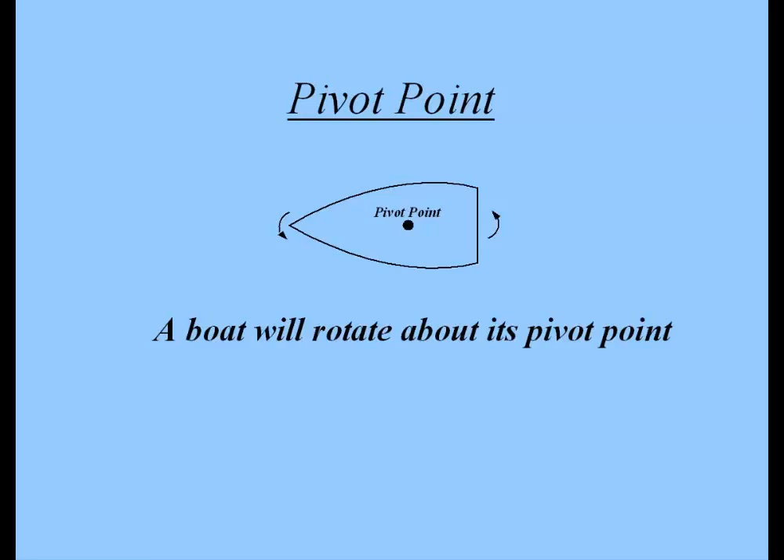So that's pivot point. The next item is the direction that the propeller turns. In the very beginning, I mentioned right-hand turning propellers. If you look at these two diagrams, you'll see in this first diagram, in ahead gear, a right-hand turning propeller. This is looking from the stern of the boat, and here's the keel, and here's the propeller. In ahead gear, the propeller is turning to the right, or clockwise. In reverse gear, it's turning to the left, and that's a right-hand turning propeller.

Now this has significance when we get to some other items and the techniques that we use.

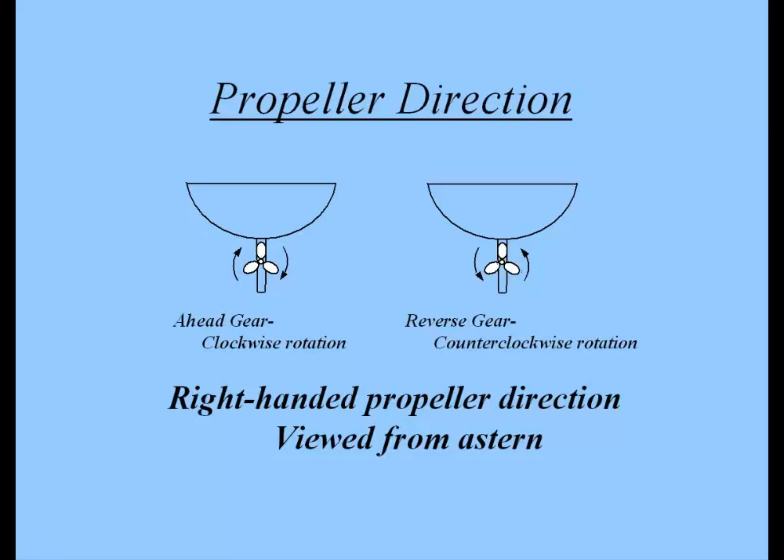But let's go on to the next concept, which is prop wash. Prop wash is like the air coming off of a fan. If you stand in front of a fan, it blows air in your face. That's akin to the prop wash. So the prop wash is the water flow coming off the propeller. In forward gear, the prop wash is flowing aft, and in reaction to that, the boat moves forward. In reverse gear, the prop wash is flowing forward, and the boat moves to the stern.

Now notice here in the forward gear, the prop wash flows over the rudder, and in reverse gear, the prop wash does not flow over the rudder. So that makes a difference in some of the controls that we use. Now this is the configuration that we have in most boats, and I'm not talking here with outboards or special marine drives, but I'm talking about a rather conventional arrangement with propeller and rudder, which is what you normally have on most boats.

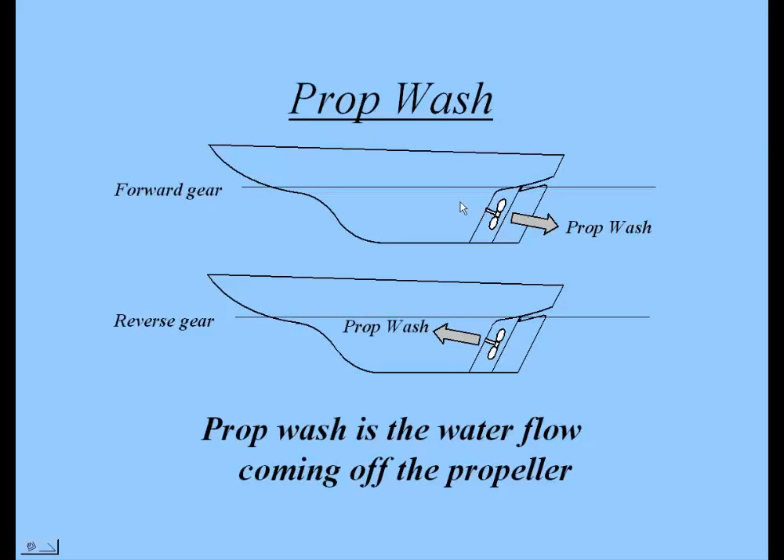The next concept is rudder control of the prop wash. Now you recall that the prop wash in forward gear is flowing aft, so that when we turn the rudder, if you look at the solid figure here, that's a boat facing in this direction, and the rudder is turned to the right, and the prop wash coming off the prop is deflected to the right. The result of that is that the stern of the boat will move to the left and rotate about its pivot point as a result of the reaction to this prop wash being deflected.

If we turn the rudder in the other direction, the prop wash will flow to the left and the stern of the boat will turn to the right. Okay, so that's how you control the prop wash in forward gear. In reverse gear, there is essentially no control of the prop wash.

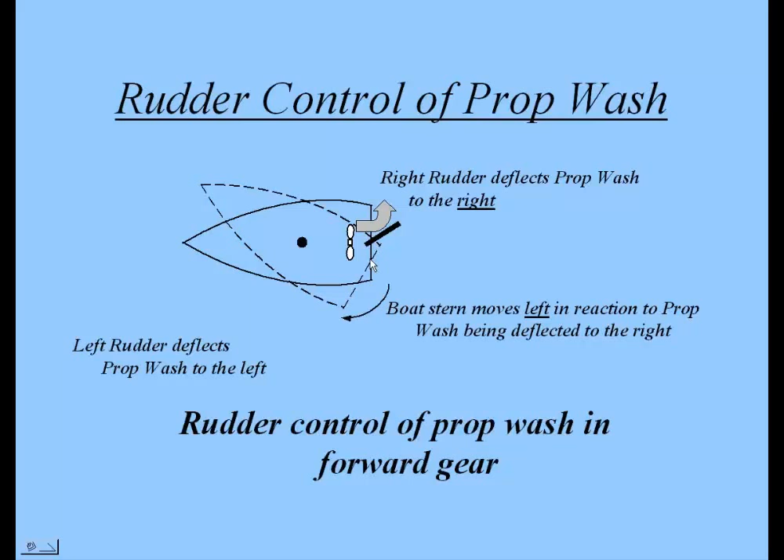So therefore they pull the stern of the boat to the left, or to port. The blade that's on the top is less efficient, and it does not have the effect of countering that pull to the left. So prop walk with a right-hand turning propeller, when it's in reverse, will pull the stern to the left. Prop walk is to the left is the thing to remember in reverse gear.

All right, the next item shown is turning arc. So this shows two diagrams of two different boats, and the one on the right has right rudder, and if you are going forward, the boat is going to follow an arc to the right. And if you go astern, the boat is still going to follow an arc to the right. So basically, the boat will follow an arc to the right, either in forward or reverse, when you have right rudder.

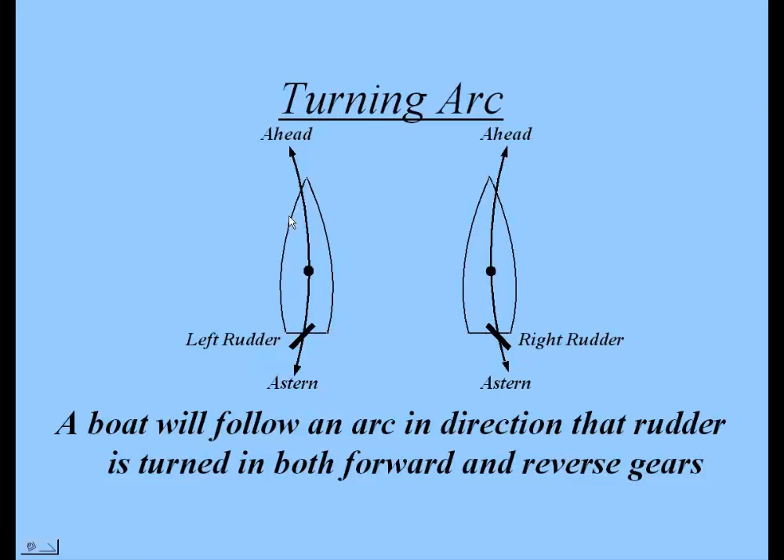In left rudder, a similar thing - it will follow an arc to the left. That's discounting any conditions of wind effect acting on the boat.

This shows a comparison between tiller versus wheel steering. In both cases, we're steering the rudder to the right, but in order to accomplish that with a steering wheel, we had to turn the wheel to the right to turn the rudder to the right. However, with a tiller, we push the tiller left to turn the rudder to the right. So if I say right rudder, with a tiller, you push the tiller to the left. But right rudder with a wheel, you turn the wheel to the right, just like you do in a car. You would be steering the boat in that manner.

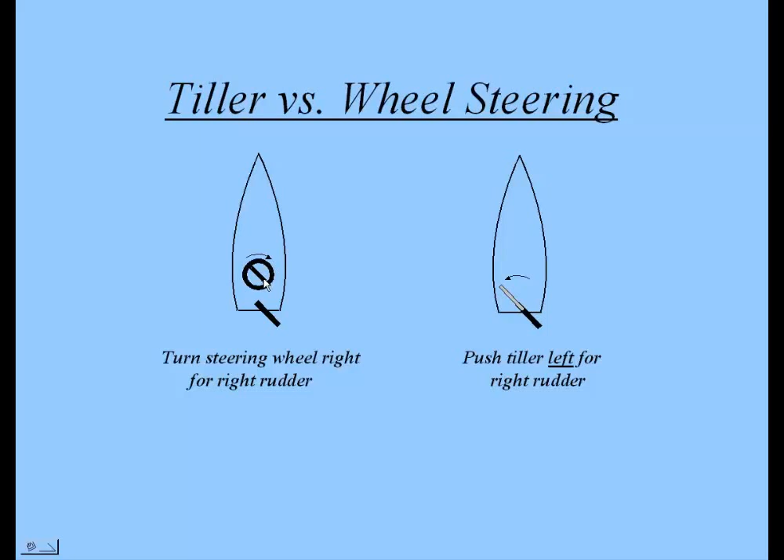Now this shows the effects of wind on a boat. A crosswind generally will blow most boats bow down with the wind. That's because the drag on the underbody of the boat is greater aft in the boat, and the drag on the rigging and the furled sails is greater forward in the boat. So the result of those two effects is to turn the bow downwind with a crosswind.

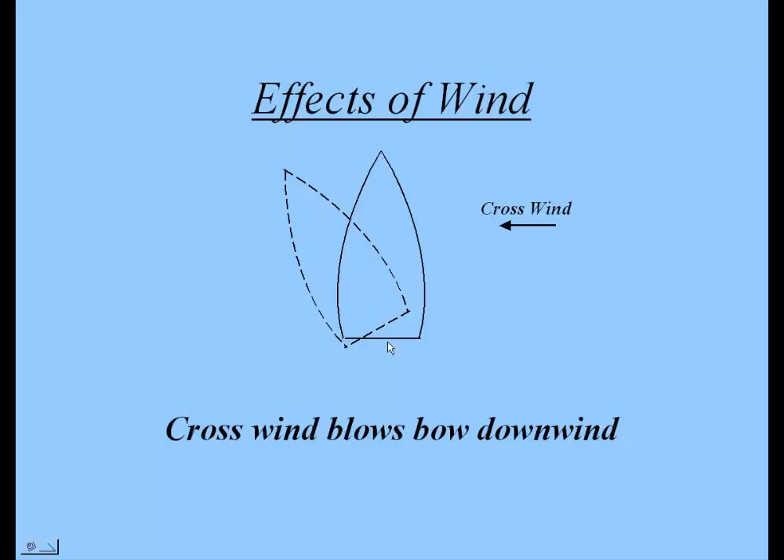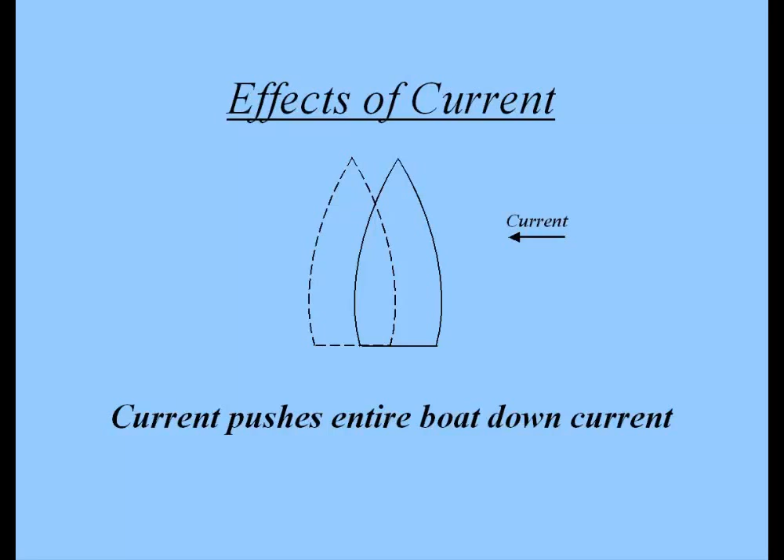The next shows the effects of current, and essentially that's going to move the entire boat. It's going to just transfer it down current.

The next item I want to mention is momentum, and that's related to the weight of the boat. The heavier the boat, the greater the momentum of the boat, and the momentum basically resists changes in speed. So a heavy boat will coast longer when it's moving, or it will take more power to speed it up. A lighter boat will do the opposite: it'll coast a shorter distance and it will take less power to speed it up.

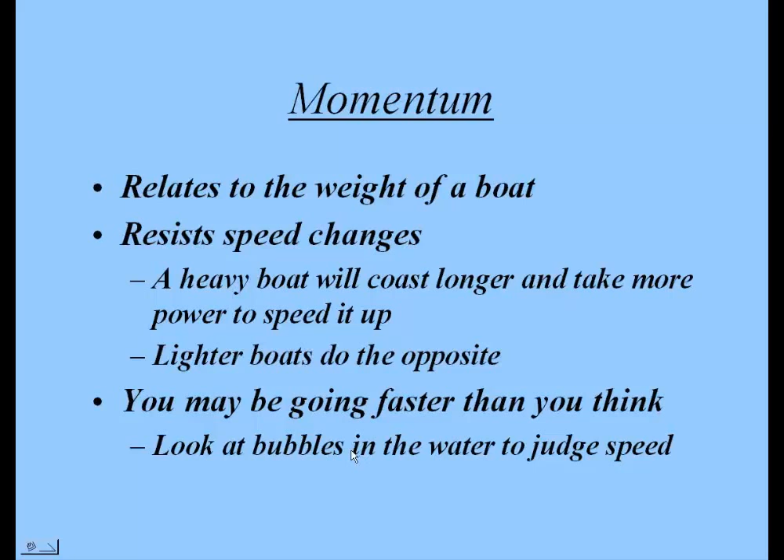You may be going faster than you think, and a lot of times in docking situations we say at certain points come to a complete stop. You look around you and think you're stopped, but if you look down at the bubbles in the water next to the boat, you'll see that the boat may still be moving along much more rapidly than you think it is. So check the bubbles in the water.

Throttle speeds, and these are somewhat arbitrary, but it's just to give you a concept of the kind of engine speeds we might be talking about. With a diesel engine in a boat, let's say a sailboat of about 30 feet in length, for slow speed you'll generally have the engine at about 800 RPM, at half speed ahead about 1500 RPM, and full throttle ahead about 3000 RPM. The reverse numbers are similar.

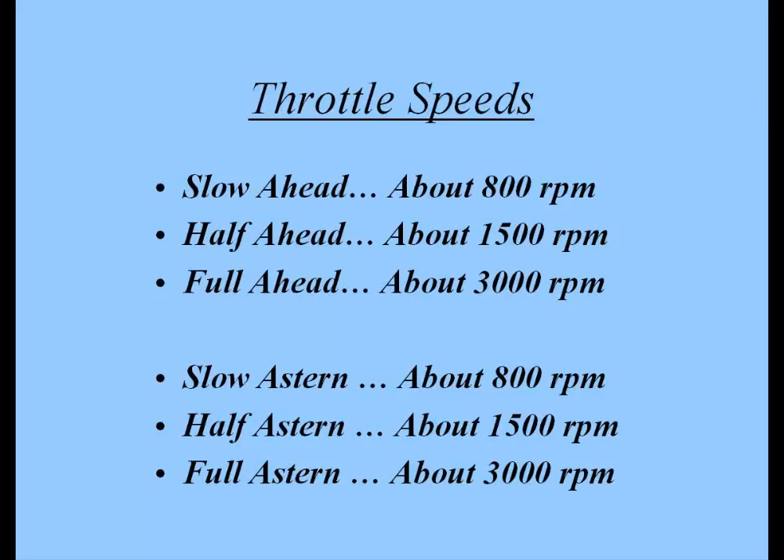Now, a term called throttle kicks. When we're doing our docking, there are certain times when we have to kick the engine, kick it hard or kick it not as hard. A kick ahead refers to full throttle ahead for about 3 seconds. A lot of times people are hesitant about going up to full throttle, but you have that momentum, that inertia of the boat, and you're trying to change its direction or boat speed, and there are certain times when you have to really pour the coals to it and kick it hard, kick it in the butt. So full ahead for 3 seconds is a kick ahead.

A short kick ahead would be half speed ahead for 1 second, just a short burst. The astern kicks are similar: kick astern and short kick astern. We use that terminology in our docking procedures, and when we're talking to each other during a docking maneuver: kick it ahead, or give it a short kick ahead. These are things to remember in that regard.

Now, rudder position. Again, this is somewhat arbitrary, and it's based on a wheel on the rudder, which from stop to stop is about 1.5 turns, which is the average for most boats, 1.5 to 2 turns. Right rudder, you turn the wheel a little bit to the right. Half right rudder, turn the wheel about a third turn to the right. And full right rudder, turn the wheel to the stop, about three-quarters of a turn. Left rudder would be similar. If you can't remember all these things I'm going through, they are covered in our docking manual.

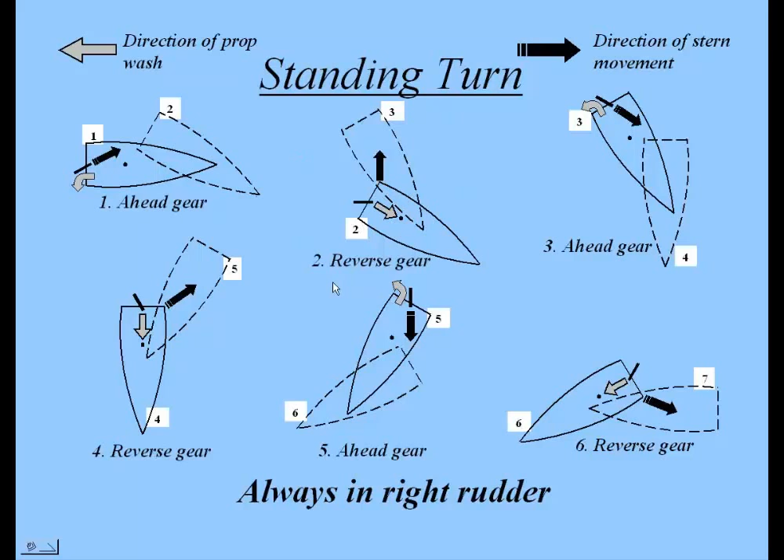So that's a standing turn, commonly used in docking procedures—either a full 360 turn, a quarter turn, or a half turn as shown here. You want to master the standing turn; it's a vital procedure for docking a boat.

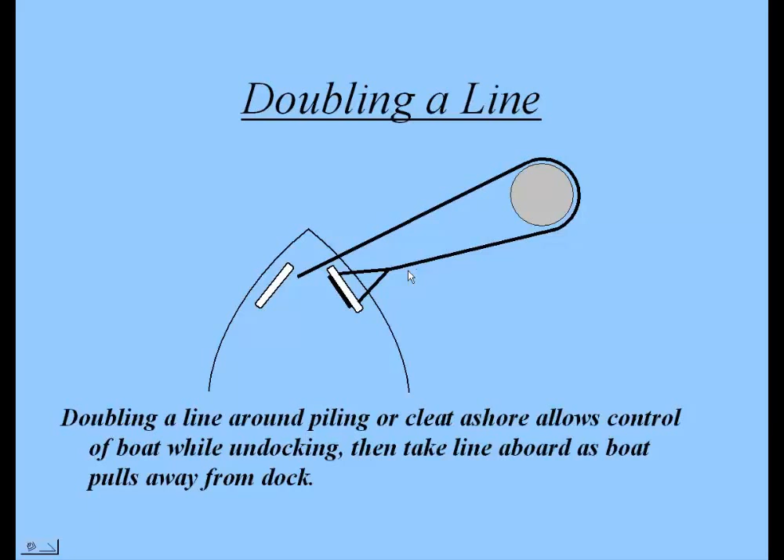The next item I want to show you is doubling a line. This is when you're getting away from a dock and want to bring your line with you, but maintain control on a dock cleat or piling. You'll double a line around that piling so that as you back out, you can take the line with you. We'll refer to this in some of our procedures in a few minutes.

I mentioned shifting gears—don't jam the gears through neutral. Coordinate the gear shift and the throttle, and speak the words to yourself: forward, neutral, reverse, to make sure you make a conscious stop in neutral.

Mooring lines, what we recommend is 3-strand nylon. I recommend against using braided nylon for mooring lines. They don't handle as well in your hand, and they also don't resist abrasion as well as 3-strand nylon.

We always use nylon for docking lines because nylon line stretches. Actually, it'll stretch about 40% of its length before it will break. So 3-strand nylon is the line to use.

Secondly, I recommend plain ends with a bowline knot as needed, and avoid the use of braided loops. The reason is, when you put your loop on a piling or a cleat, sometimes someone else comes along with another boat and puts their line over yours, and when you're trying to get out, it's locked in with a braided loop. It's easy to untie a bowline and just slip your line out.

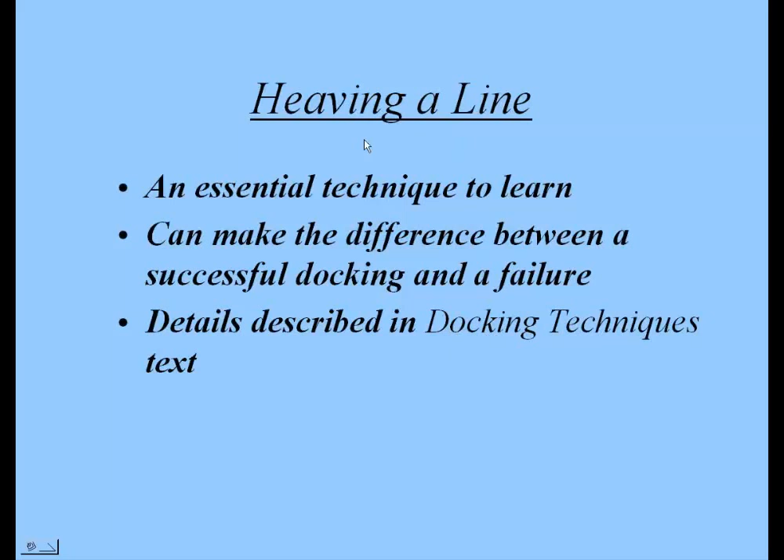Docking safety: I suggest you don't attempt to manhandle large boats over 28 feet, because this is where injuries can come in. By manhandling, I'm referring to pushing on a piling with your hands, putting your foot on the piling or on the dock—these are where injuries come from. We recommend that once boats get up over 28 feet, they're getting heavy enough that you can sustain injuries.

Now, alternatives for docking in strong wind: one is to use spring lines, which we'll go over. A second alternative is to use a more accessible dock than you were planning to use. Thirdly, you might temporarily anchor out and not dock until the strong winds pass. Also for docking safety, remember to always plan an escape route for all your dockings, and we'll talk about this as we go through some scenarios.

Crew assignments: ideally you want to have 2 deck crew. People have asked, what about single-handed? You'll use the same procedures single-handed, but you have to do all the jobs by one person. So you have to understand the procedures, the techniques, the forces that act on the boat, but one person may end up doing it, so you have to be more agile for that purpose.

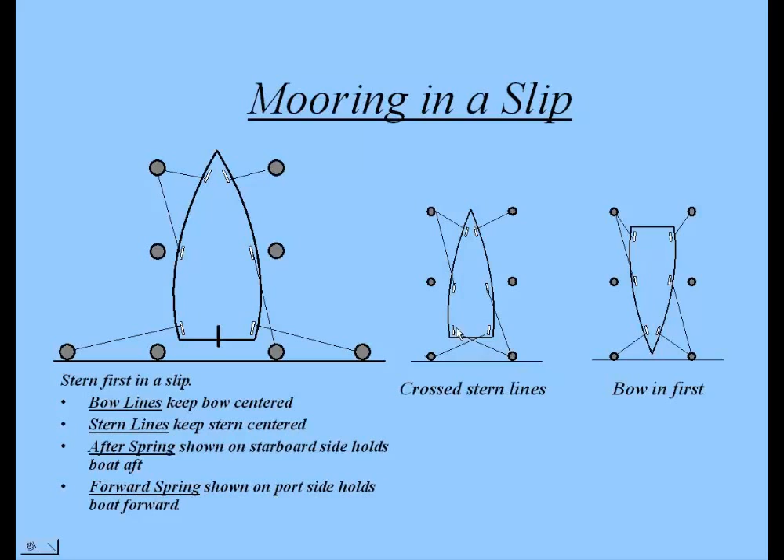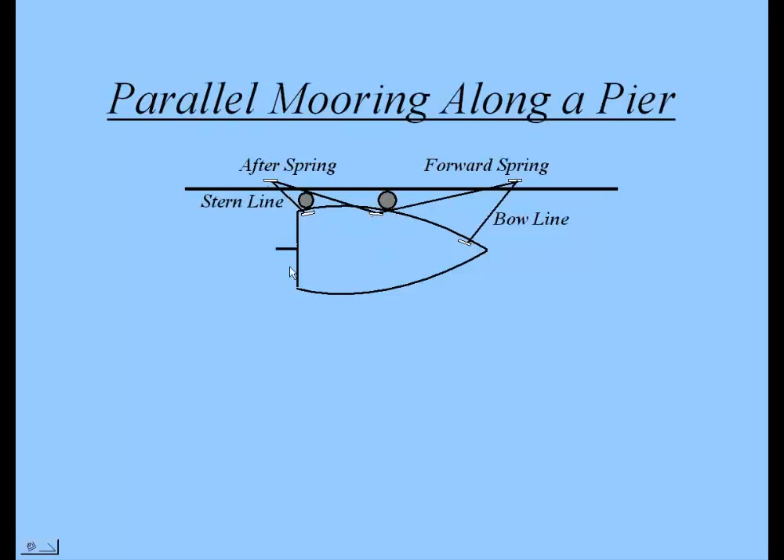If you have an arrangement where the wind is blowing strongly onto the dock, you may want to use an anchor, though you may not always have the room. This may be a fairway where it's not good to put an anchor out. But if you have the ability with a strong onshore wind, an anchor is one way to protect the boat and hold it off the dock. Your line arrangement is similar, but what you're doing with the anchor is basically taking the pressure off the boat riding up against the dock.

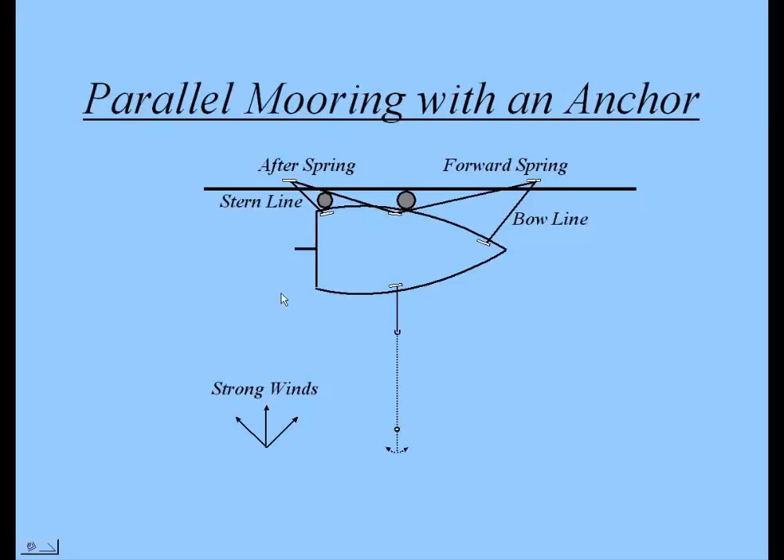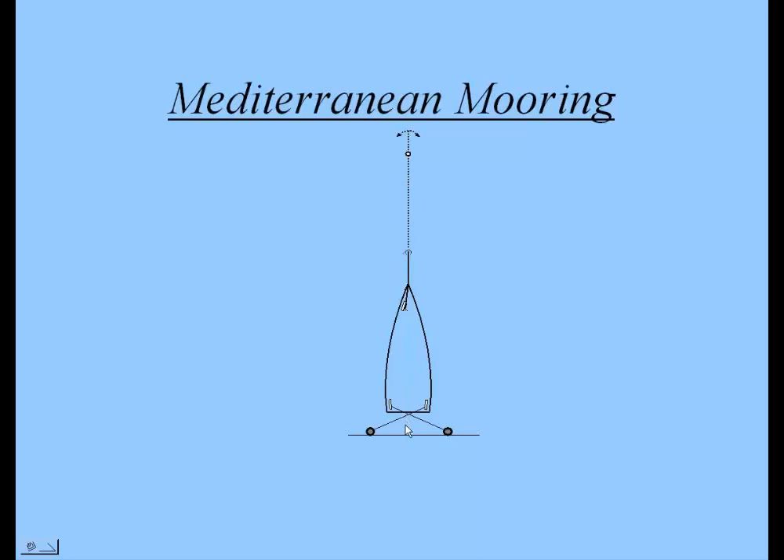A seaworthiness inspection of the boat means you generally check the entire boat, first for Coast Guard required safety equipment, including your PFDs, that is personal flotation devices, and flares, boat documentation, your man overboard equipment, engine and transmission oil levels, your steering gear, fuel and water tank levels, your through hull valves, bilges, bilge water, electrical panel and equipment, your instruments, your nav lights, your sails, your mast, your boom, standing and running rigging, ground tackle, dock lines, fenders, and the list goes on and on. You want to know that your boat is ready to go to sea.

You also want to check on your weather forecast, both over the VHF, maybe before you got down to the dock you checked on the internet. When you get to your boat, check the VHF and the NOAA channels, and if available on your boat, your Navtex receiver, which has weather forecasts on it. I highly recommend Navtex on boats even sailing coastal waters.

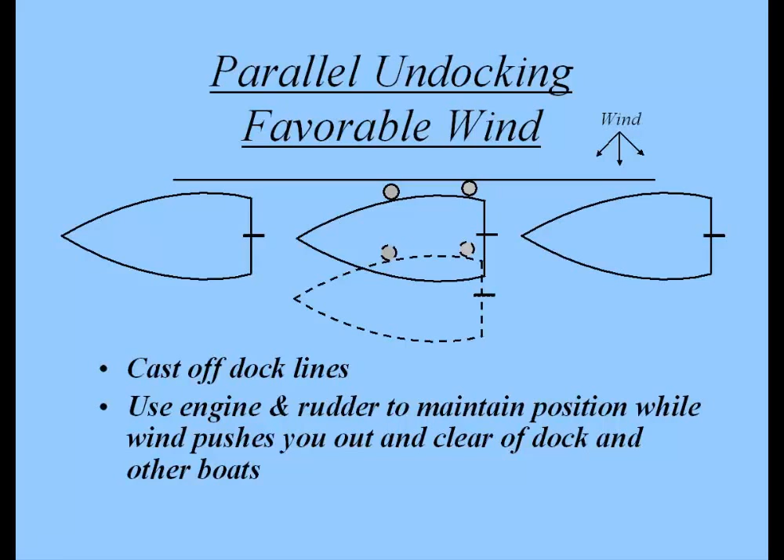Here's the simplest procedure for getting underway from a parallel docking arrangement where you have favorable winds. Here's the dock, and here you are in the center boat, with boats fore and aft of you. To get off this dock, you basically disconnect your mooring lines and let the wind blow you out. You have the engine running, of course, before you started this, and use short kicks of the engine forward or reverse to maintain position and orientation, that is the heading of the boat. Short kicks with the rudder forward or aft to maintain position while you're being blown out, and then you can get away from the dock when you clear those other boats.

That's the simplest departure. You have another situation where you have wind blowing onto the dock, and here you're being pinned against the dock with the wind. You have fore and aft boats obstructing your departure, and there are two procedures for doing this. One is the stern out procedure, and as I say, you have opposing wind.

You have a fender on the bow as well as back here, but the one on the bow is vitally important for this procedure. You have an after spring line from a bow cleat to back here on the dock, and what you will do is have right rudder and power forward slow ahead, in order to turn the stern of the boat out.

Now the spring line is going to hold the boat from moving forward, but the prop wash on the rudder is going to push the stern out. You want to have a deckhand forward with preferably a non-collapsing pole that you can use to push off the bow from the dock.

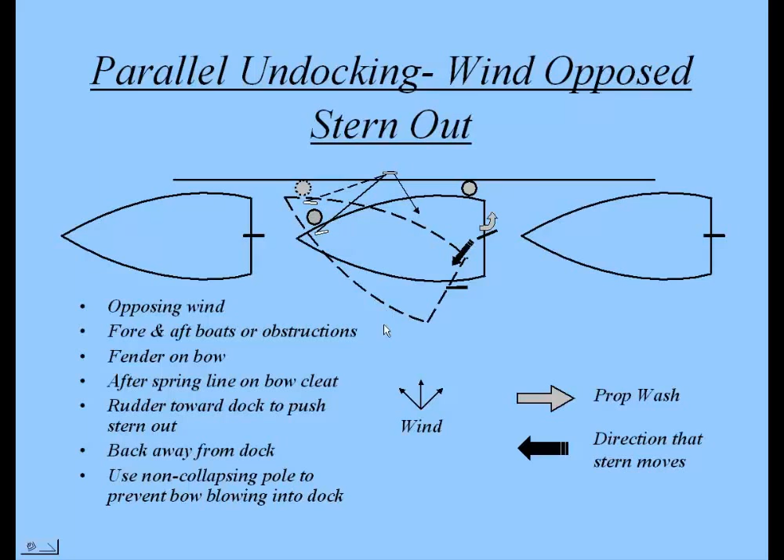So basically this is swinging the stern out and then backing out this way. Now with the wind blowing in this way, once you clear the bow from the dock, you also have to worry about this boat here. So you have to be prepared to clear this boat as well, and use your pole for that. So that's the stern out procedure.

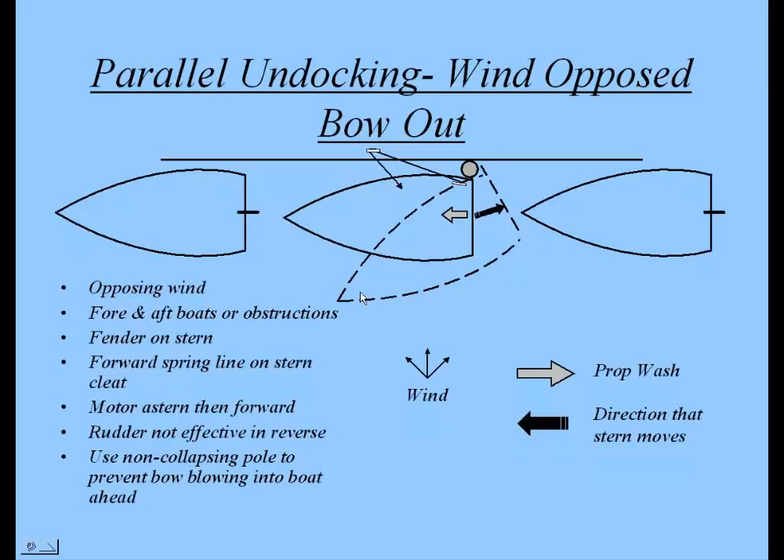The next procedure is bow out, and this is simply the opposite. Here you run your spring line from a stern cleat to a dock cleat, and you go in reverse gear. There's a fender on your stern, and the boat turns bow out, and you can then motor out. Between the two, I personally prefer the stern out procedure, and you might practice both in order to get proficient with both and find out what you like best.

So those are two methods for parallel undocking with opposed wind. Now the next procedure I'd like to show is heading bow out of a slip, and you have to consider the wind in these cases. In this arrangement, you are coming out of a slip, here are other slips across your fairway, and you have wind blowing down the fairway, and your desired route is going out this way towards the wind.

So when you do this, the wind is going to want to prevent the bow from turning at slow speeds, and you have to make provisions for that. If you have a strong enough wind, you may be blown into this dock across the way. So the use of spring lines in this case would help with this.

Now this spring line is run so that the line goes from your midship cleat around the piling and back around to you're holding it on deck. Two things about routing this spring line. One is, notice the direction that it's wrapped. It's wrapped so that when the boat comes out, the spring line will not be crossed. It'll straighten out into two parallel lines.

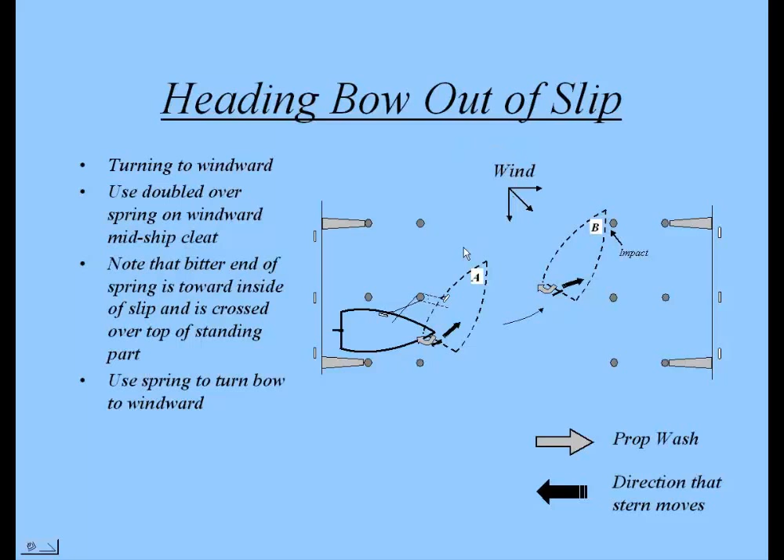So that's heading bow out of a slip with wind opposed to the direction you're going to be turning. Now here's backing out of a slip, bow to wind.

With this arrangement, here's a slip, here's a dock, here's a finger pier, and here's your midship piling. What I would be doing here is using wind opposed, with the fairway exit to the right. So I want to come and turn my boat, stern to the left, so that I can turn to the right and go down the fairway. But I have opposing wind to that, trying to prevent me from making that turn out of the slip and going down the fairway.

With this arrangement, I would use two spring lines. One is from a bow cleat coming back to this piling, and as before, it goes over the standing part, and the bitter end is held by a deck crew. The one from midship on port is similar, going around the piling and back over the standing part, so that I've got control of the boat in two directions. This is assuming I don't have a dock hand on the dock.

If I have a dock hand, I can have that dock hand handle the bow line and control the bow towards the wind as I back down. But if I don't have a dock hand, I can use the spring line, and as the boat gets to about this position, I can release that spring as shown here and gather it in. This spring line is now controlling the turn of the boat, assisting the turn into the wind, so it'll help me pull the stern around as I pull back with my engine in reverse.

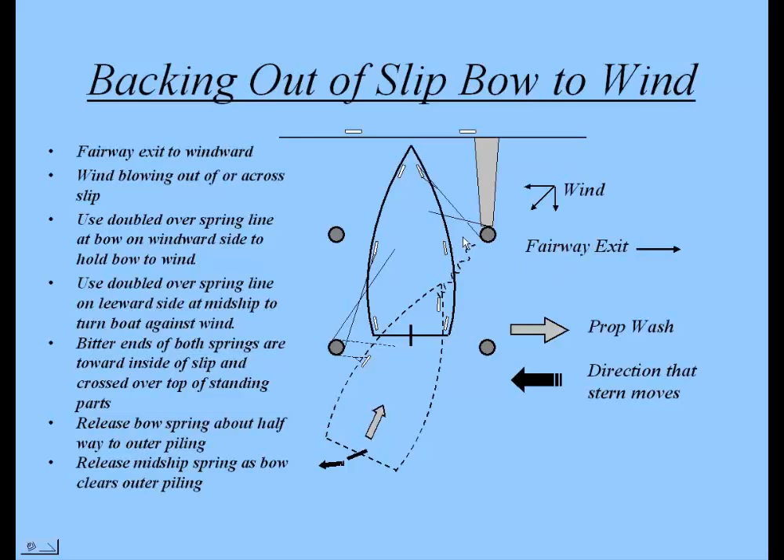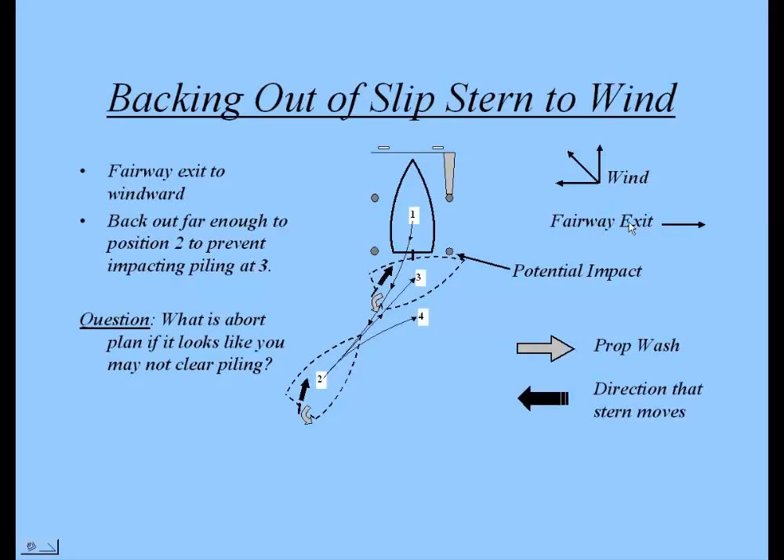The next docking arrangement that I'd like to show is coming into a dock now, and this is parallel docking along a pier.

Some of your pre-docking preparations: first, evaluate conditions that exist. If you have the ability to inspect this strange dock beforehand, and if you can do it from shore before you get on your boat, that's a good thing to do, to become familiar with what's in that slip. If you can't do that, you're going to have to call the marina ahead of time for the dock conditions, the wind angle, and the current that may exist in the vicinity of the dock you're going to get into.

You can also do a flyby in your boat—that is, before you actually go into that slip, run by it, be ready to do a standing turn to get out of that fairway, and while doing the flyby, inspect the pilings for nails and obstructions. These are ways to evaluate conditions before actually committing to docking in that particular slip. A slip that has pilings with nails in it, I wouldn't go into, because the nails can do significant damage to your boat.

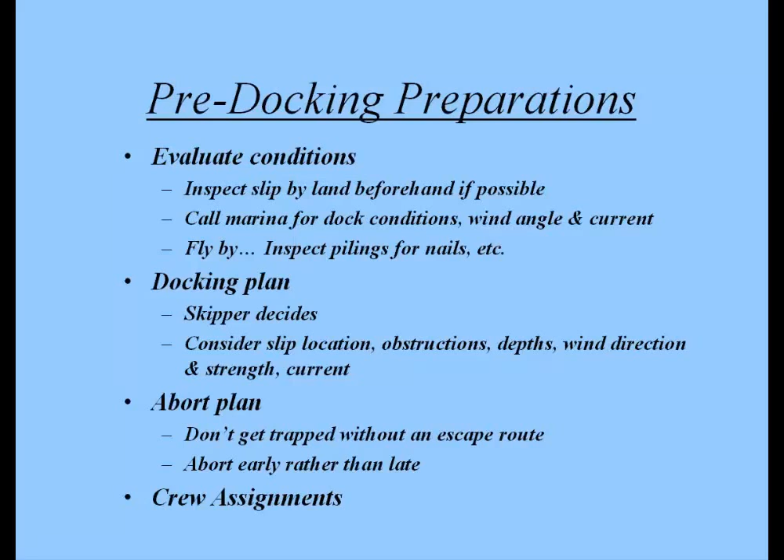Have your docking plan prepared ahead of time, because if you're coming into the slip and suddenly there's a problem—which isn't unusual—be ready to abort. The point of aborting the docking is: abort early. If you find you've misjudged your position or the wind and you're in the wrong position for getting properly into the slip, abort early, go around, and come back again to finish your docking.

So let's look at some parallel docking arrangements. First, wind blowing onto the dock: you stop parallel to the dock a few feet away, hold position with rudder and short kicks fore and aft, and allow the wind to push you toward the dock. With wind blowing off the dock, you use forward spring lines for a hemmed-in dock, and after spring lines for an open dock—I'll show you diagrams of both.

In general, all else being equal, I prefer a port side approach if possible, meaning the slip is to the port side of my boat, because this allows for a better abort route and more maneuvering room. But let me show you these other scenarios.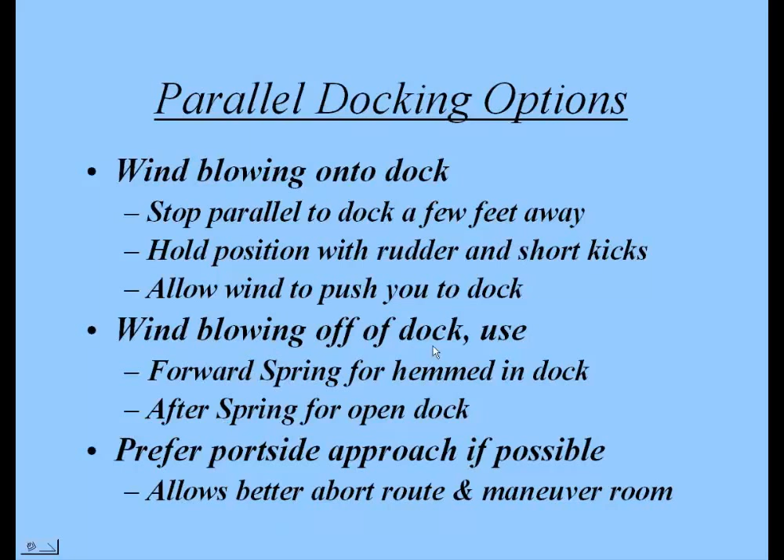Wind blowing off the dock is the hardest one. Forward spring for a hemmed-in dock, after spring for an open dock. Here's a hemmed-in dock, and I want to come into this dock. There are obstructions here and here. I want to get into this alcove on this slip, and to do this I'm going to rig lines in advance, before position 1, where the wind is blowing off the dock.

I want to rig two spring lines, or a midship spring and a bow line. The midship spring has a bowline loop tied in the end, long enough to reach the bow of the boat from the midship. The bow line has a bowline loop tied and is cleated to the bow cleat with about 6 feet of length on it.

The size of these loops depends on whether we have cleats or pilings on the dock. Obviously a piling takes a larger loop, and you want a loop that's plenty big enough for that piling. If I have a 12-inch piling, I'll generally have about a 2-foot loop in that line, big enough to easily get it on and off the piling. So I'll have these lines prepared.

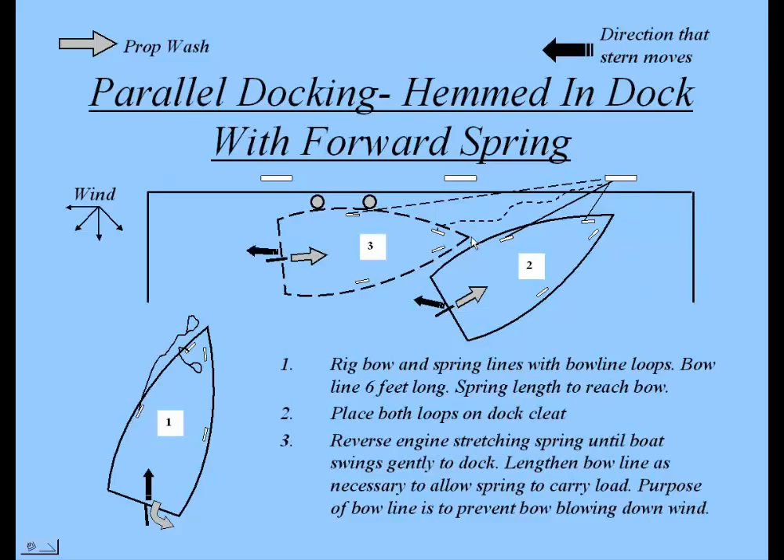So I use the rudder to control the direction of the boat parallel to the dock, but allow the spring to pull it over. Then once you're in, you rig your other dock lines. So those are a couple of parallel docking arrangements: one for a hemmed-in dock using a forward spring line and a bow line, and one for an open dock where I can come in parallel to it.

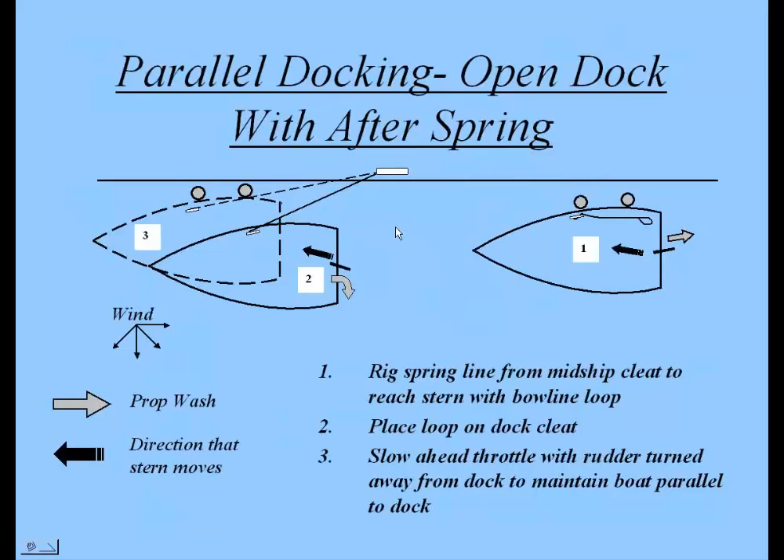You have a forward deck hand to call out your bow distances, because the helmsman cannot necessarily judge that from the helm. You're going to make a wide turn to the windward side of the slip to compensate for the bow blowing downwind. I'll show you a diagram of this.

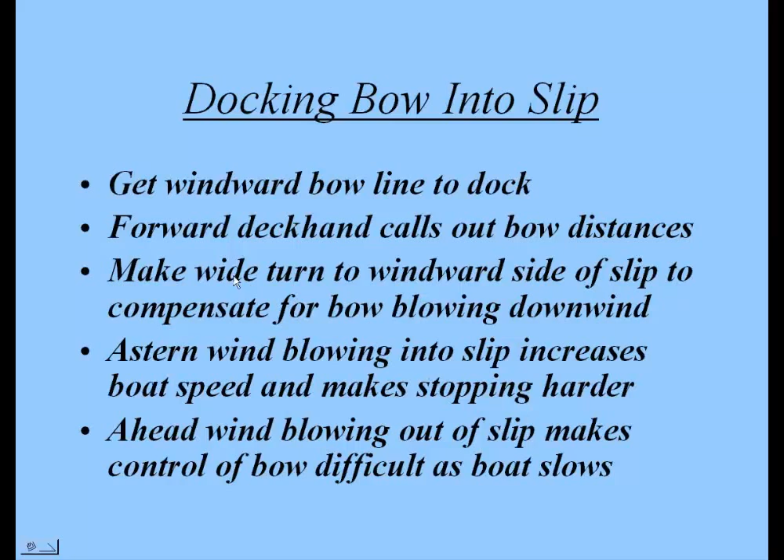And an astern wind is difficult because it speeds the boat up and has you going faster than you think you are. And a crosswind you have to compensate for in this manner.

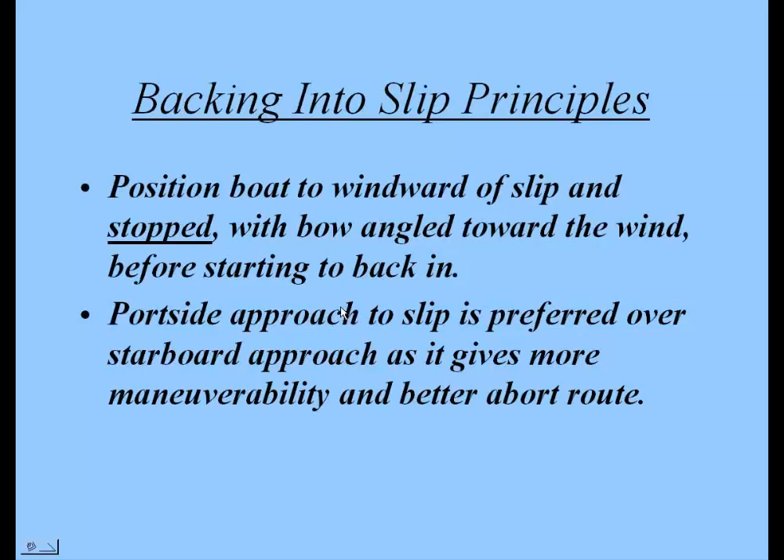Port side approach to slip is preferred over starboard side approach as it gives more maneuverability and a better abort route. I think you'll see this as we look at these scenarios. So let's look at the first scenario of backing into a slip, port side approach.

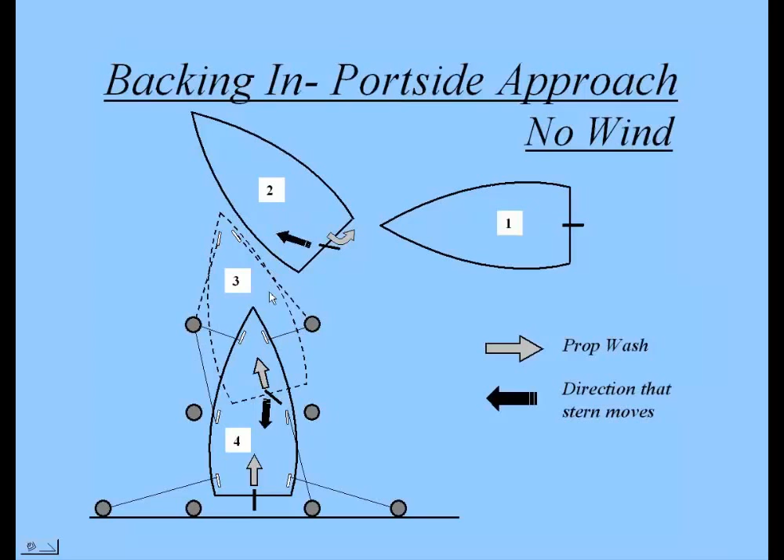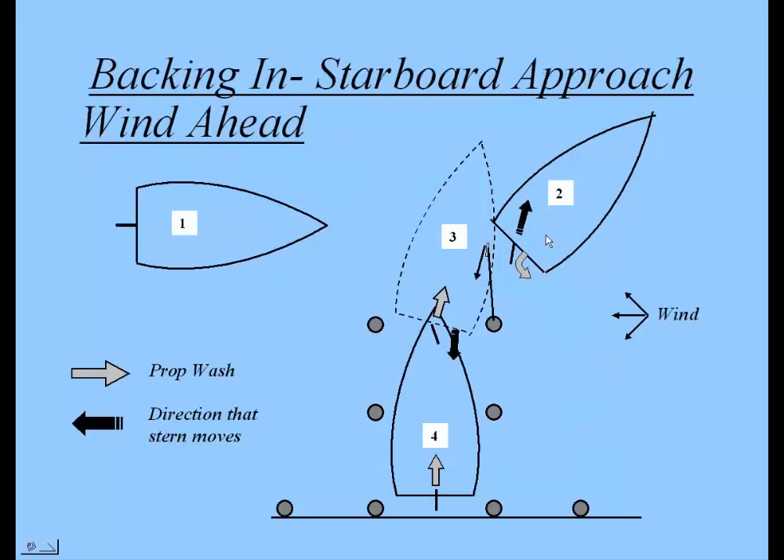And in this case, starboard approach, similar to port side approach, except for the effects of prop walk, wind from ahead. My next one is starboard approach, wind from astern. This is the hardest of all, doing a 3/4 turn or more to start my backing in.

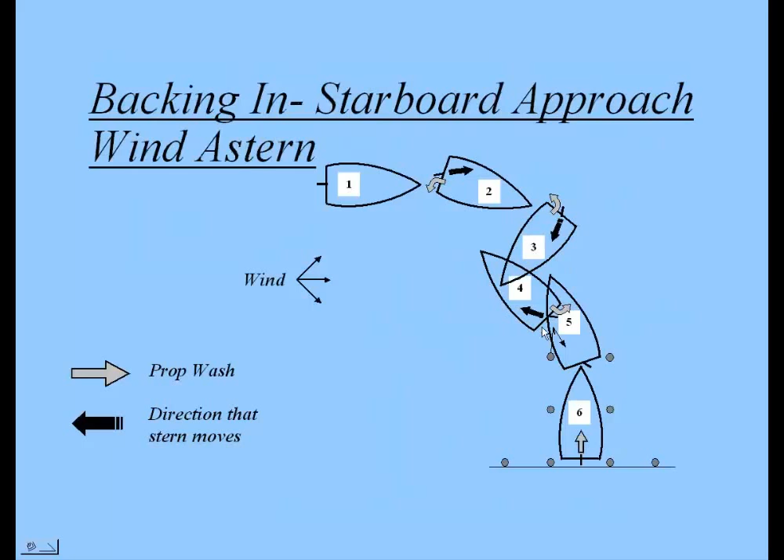Now, if you have really strong winds, let me mention these other wind conditions for backing in. If the wind is blowing into the slip, this is the most challenging wind condition that you can have, because as I'm backing in, I have the wind blowing into the slip. It's on my bow.

And oscillations in the wind keep you guessing. In other words, I'm backing in, and for one moment the wind is on my starboard bow. The next moment it shifts to my port bow, and it has differing effects on the bow of the boat as I back into the slip. Wind blowing out of the slip while backing in is the easiest wind direction, because it weathercocks the boat to line up with the slip center line.

Now, in strong winds, we'll use what I call a waterman spring line, and that is this. First off, it requires that you have a clean piling with no nails in it. It also requires that there's not another boat in the adjacent slip with their bow or stern sticking out to obstruct you, so you need the room to do this. But this is what the watermen on Chesapeake Bay commonly use to bring their fishing boats in single-handed to a dock.

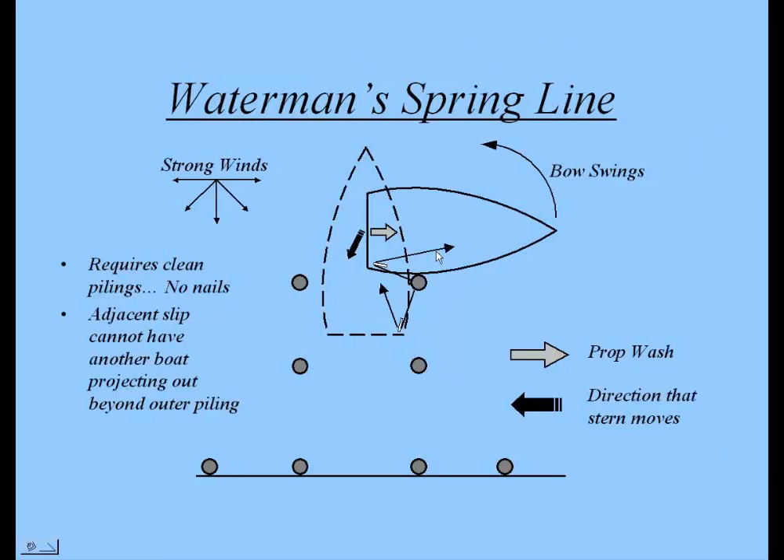So those are methods of getting a big boat into a little slip.

Now let's summarize all that we've gone through. First off, you have to understand the forces that act on a boat during the docking procedure. Understand the effects that wind has, that current has, prop walk, prop wash, rudder action right or left, and so forth. Learn how you can control these forces, and don't look at the wind necessarily as an enemy. The wind can actually be a benefit while you're docking if you know what it's doing and how to deal with it.

You want to remain alert for the effects of wind and current. When you're backing in, pay attention to the bow of the boat — what is the bow doing at the present time? Use slow speeds during docking, look at the bubbles in the water, and make sure you know whether or not the boat is stopped or still has way on. As I say, pay attention to your bow.